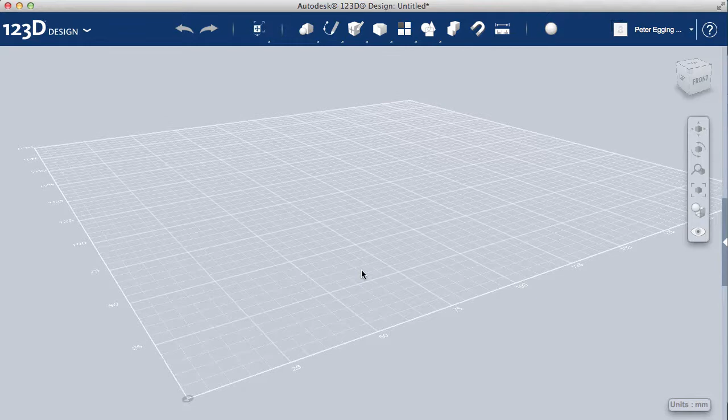In the first video we're going to start creating our mobile phone accessory, and just before we start I thought I'd show you what we were aiming for whilst creating this project, just so you can get an idea. And this is one that I produced slightly earlier, so I just thought it'd be useful just to show you the kind of thing we're looking for.

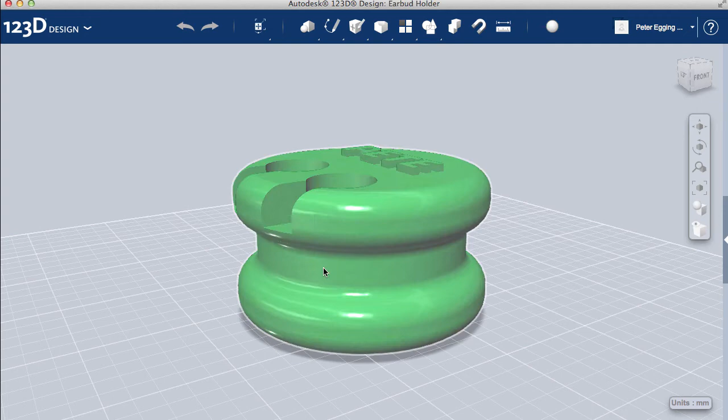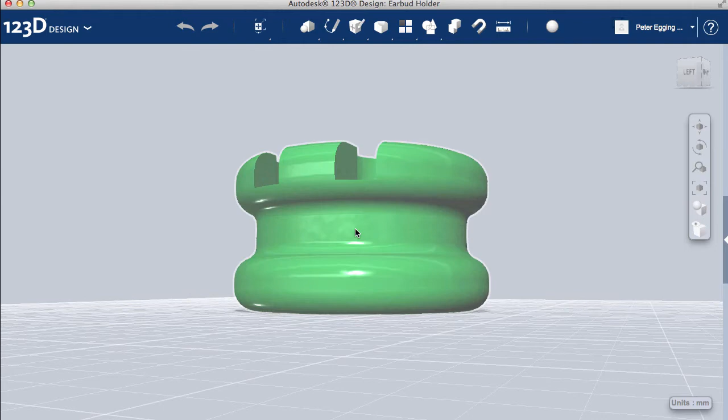And for this I've created an earbud holder, which would be really useful as a mobile phone accessory, especially for the project that we're looking at where we're designing it for a teenager. So we can see we've got somewhere to put the earbuds themselves and an area to wrap around the cable, and I've even added just a little feature of my name just to personalise it slightly. So this is what we're aiming for.

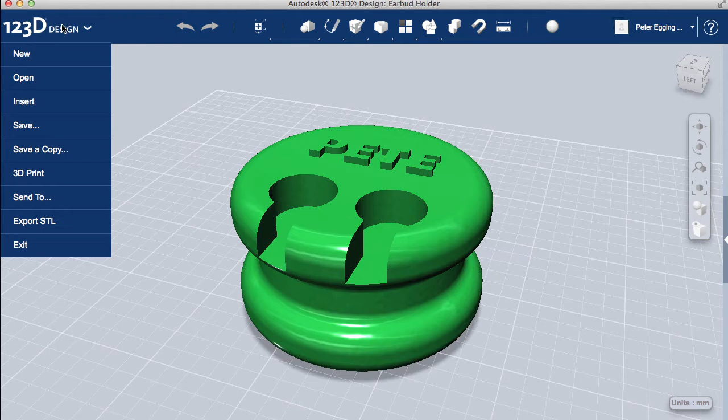So to begin with we need to create the basic shape, before we add some refinements later on. So to start with, we're going to go down to the menu and we're going to go to New, and this is exactly the same screen that you're greeted with when you first load 123D Design. So to begin with, we're going to go up to the sketch panel, the icon's like a little pencil, and we're going to grab a circle.

And the first thing it asks you to do is to click on the grid where you want to start sketching. So I'm just going to click once with my mouse, and then we need to click again to specify the centre of our circle. Now what you'll find much easier in this case is if we can look at this grid flat on, it makes sketching far easier. And the way we can do that is we can either drag down on the cube, or the way I prefer to do it is just to click on that top face and it'll spin it round so that we can draw from a bird's eye or a plan view of our shape.

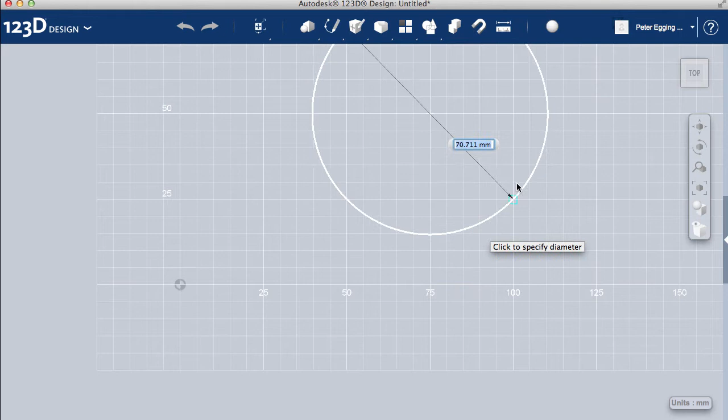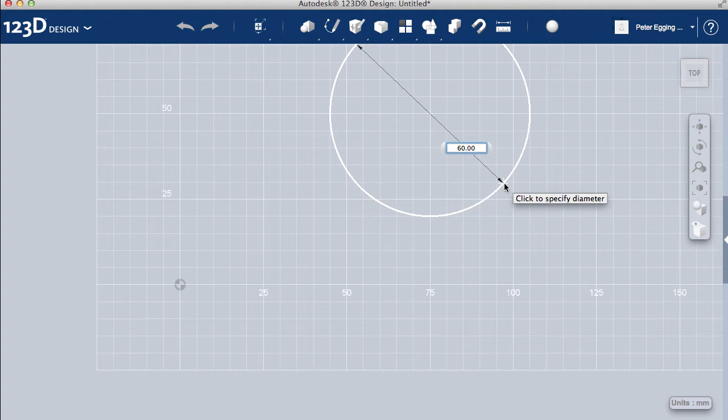So I'm going to click to start the centre of my circle, and then I'm just going to drag with my mouse, and we can see that it creates our circle, which it's already dimensioning for us. And I'd like this to be 60mm, and you're going to find it fairly difficult to move in with your mouse really carefully in order to get that. And the easiest way I find is just to type 60, unless you've got a really steady hand. So I'm going to type 60, I'm just going to hit the enter key, and I need to click to set or specify that diameter that I've created, and we notice it goes a beigey colour once that's done.

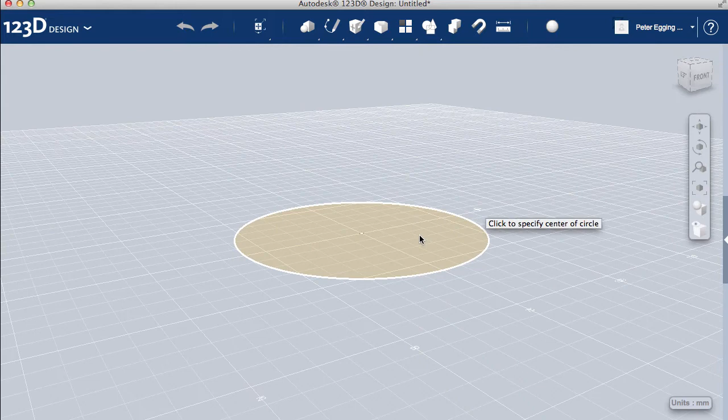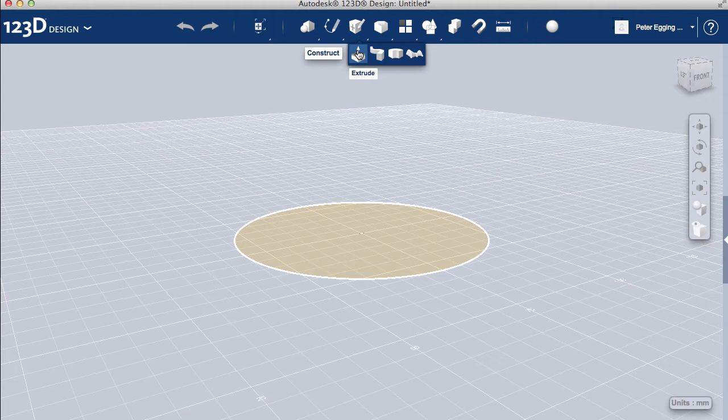So once I've finished sketching that, I'm actually going to press the little home button and go back into a 3D view. I always find it much easier when you are starting to add a 3D element, it's just much easier to see when it's in 3D. So in order to do that, I'm going to go to the construct menu, which is just to the right of the sketch menu, and I'm going to go for the first one, which is the extrude tool. And the extrude tool is going to give our 2D shape, our 2D circle, a thickness, and to use it I'm going to hover over and just click with the left mouse button.

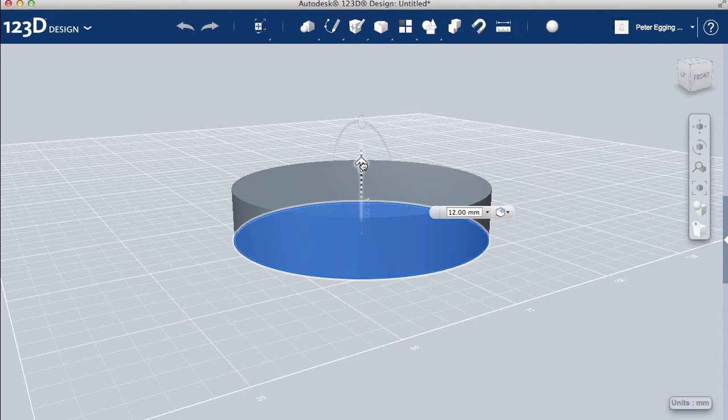And again, two different ways here. I can either use the little arrow, select and drag upwards to create my shape, and again I'm looking for a dimension of 12mm here, so I can either drag and look out for the 12, or again it's sometimes easy just to type in 12.

When I'm happy with that, I'm just going to let go with my mouse, and to say OK for that menu I'm just going to hit the return key. And what we can see is that it's now created us an extrusion of our 2D sketch, of which we created a circle.

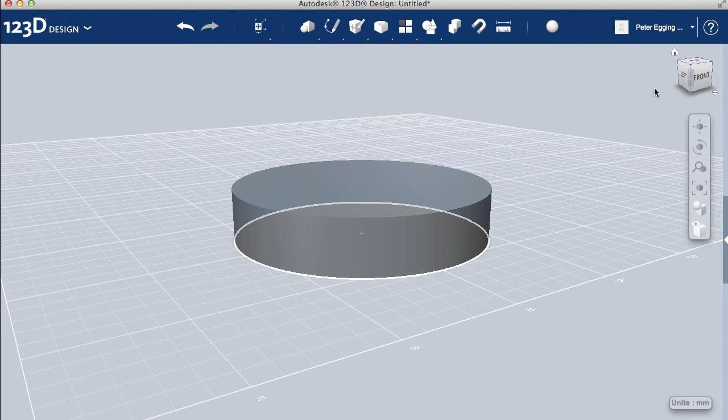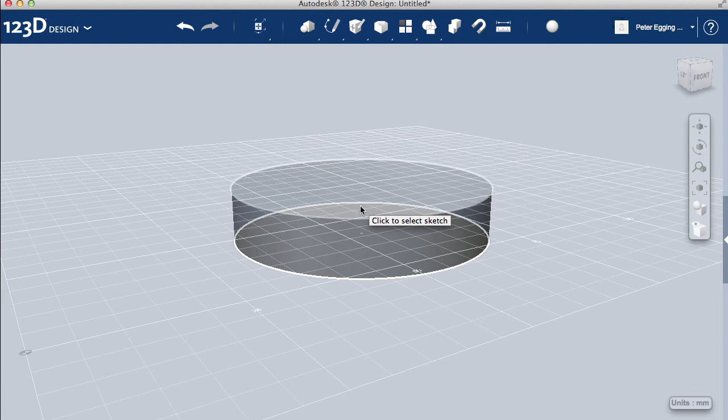So the next thing I need to do is to apply another circle just to this top face in order for it to produce the next shape that I want. So again, just to make it easier, I'm going to go into the top view, but before I do that, what I did want you to see is as I go to sketch another circle, you'll notice that the grid will change when I hover over this top surface. So I'm sketching on the bottom surface just there, and if I just move up slightly, I'm now sketching on that top surface.

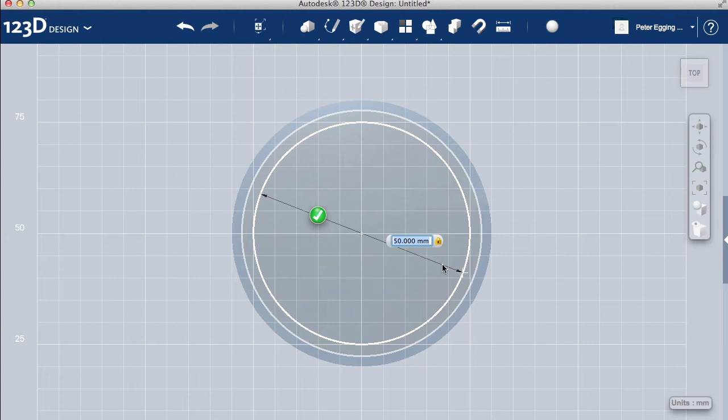So you might find it easier to select that before you do that, and when it asks you to specify the centre of the circle, again, just to make it so much easier for yourself, if you rotate around on that cube and go to the top view, click the circle and then drag out, and again I'm going to type in the dimension here because it's much easier in my opinion. I'm going to hit the enter key, and then to set that dimension I'm going to click the green tick. So I can see I've got a beige surface. When I go back to the home button, I'm ready to apply another extrusion.

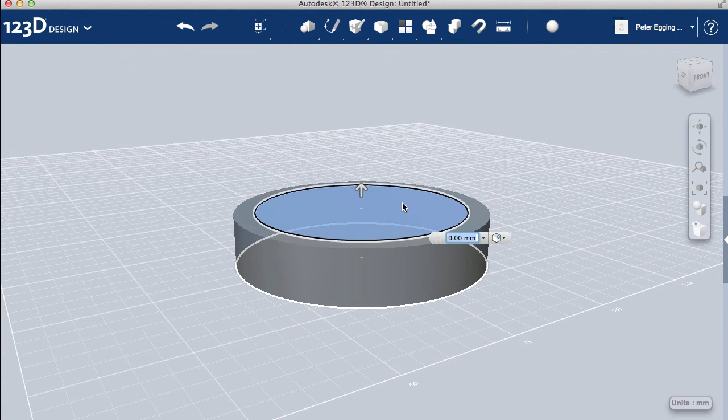So I'm back to the construct menu, and I'm going to go to extrude, and I'm going to click on the shape. And this time, rather than using the arrow, I'll just type in the dimension I'm after, and in this case it's going to be 10 millimeters. Now, same again, I'm going to go for another circle, and again I'm going to replicate the bottom extrusion that I did just on the top surface.

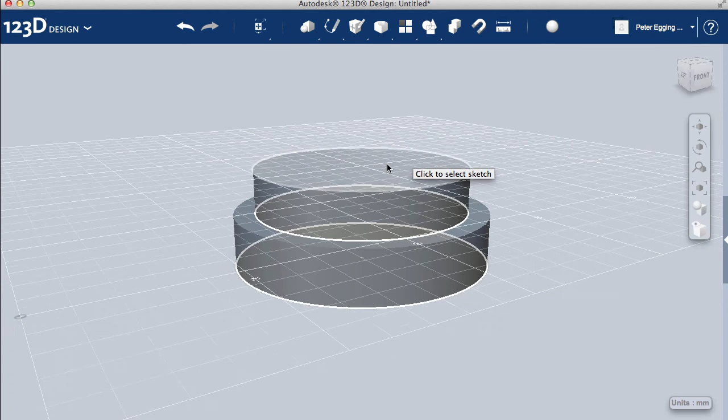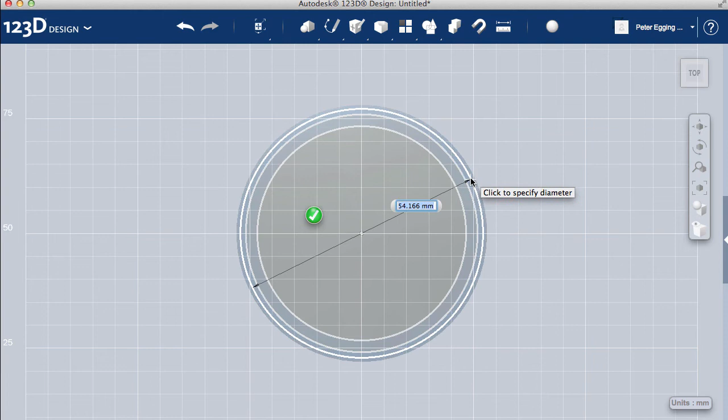So I'm back to the sketch menu, select on circle, and again, before I go to the top view, I'm just going to sketch onto that surface, and it's going to move that grid up for me. Specify the center. I'm going to go to the top view, specify the center, and again drag out. Now I could try and line it up with the edge of the other one. Again, it's really difficult, and you're going to find it much easier to begin with just to type the dimension you're after. Green tick to say yes.

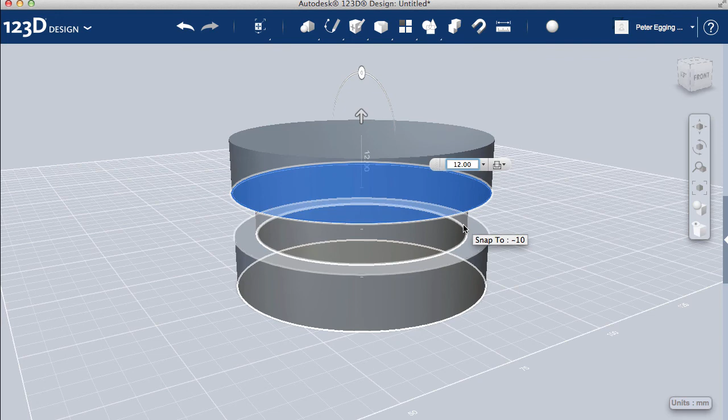And when I go back into 3D view, I can go to the construct menu again, down to extrude, click on the profile I'd like to extrude, and again, just for ease, I'm going to type this one in to 12 millimeters, and I'm going to click the Enter key on my keyboard.

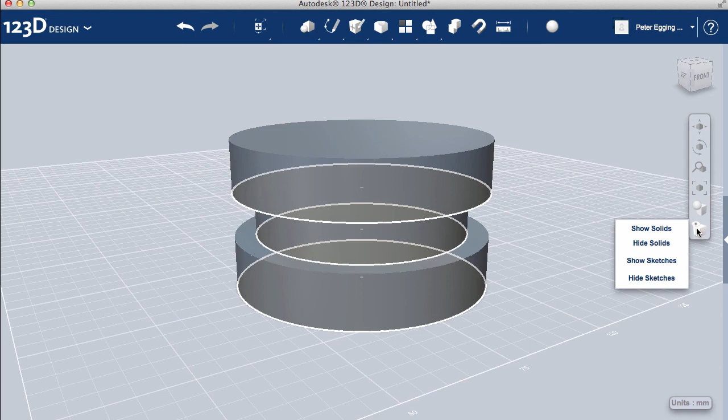So you can now see I've got the basic shape that I need for this earbud holder, but you'll notice at the moment I can see the 3 sketches that I put, and they're kind of obscuring the view of the shape, and there's a really quick way to turn that off. If I go down to the bottom icon on the navigation panel, and if I click on hide sketches, those sketches will disappear and just leave you with your 3D model, your solid model that you've created, and to me that seems a much better way.

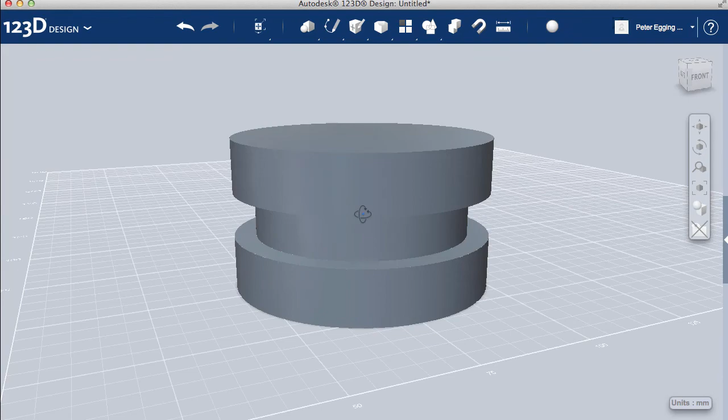So if we hover over this model and hold down the right key on our mouse, we can orbit around to look at it in 3 dimensions. There's not much to look at yet. If you wanted to, just to get the hang of it, you can spin it around. Again, don't worry if you go upside down or spin it around too far. We've always got the handy little home icon, which will put you back to that 3D view.